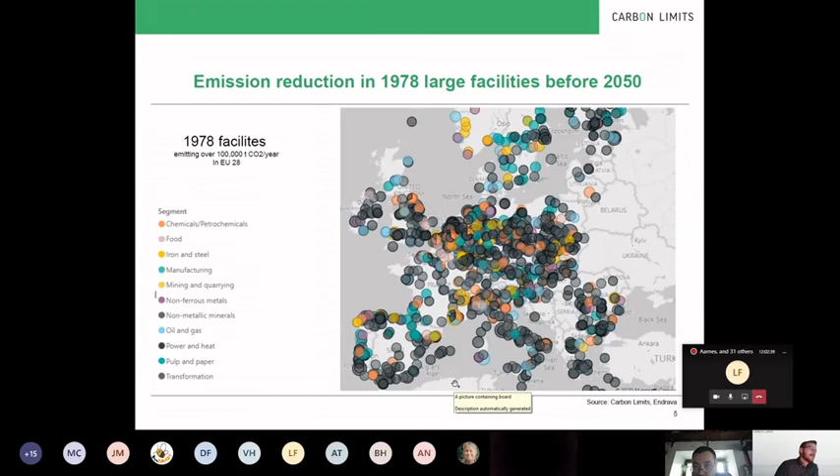And if you look at the industries with high to medium likelihood, which would be cement, waste-to-energy, chemicals, petrochemicals, refineries, and metals, you would have something like 275 million tons of CO2 in technical potential. For waste-to-energy and cement, which is high likelihood, you could have 167 million tons per year.

So hydrogen is, of course, something that is a great uncertainty too. There's a great uncertainty on the level of hydrogen production in the future, which depends on the pathways taken for industry, transport, energy. And also for CCS, it depends on which pathways are taken for production.

And there seems to be a clear trend that most analyses see that hydrogen production with CCS is more cost efficient than green hydrogen, but green hydrogen seems to be pointed out by countries and the EU to have a higher potential in the long term.

But which of them would win is difficult to tell.

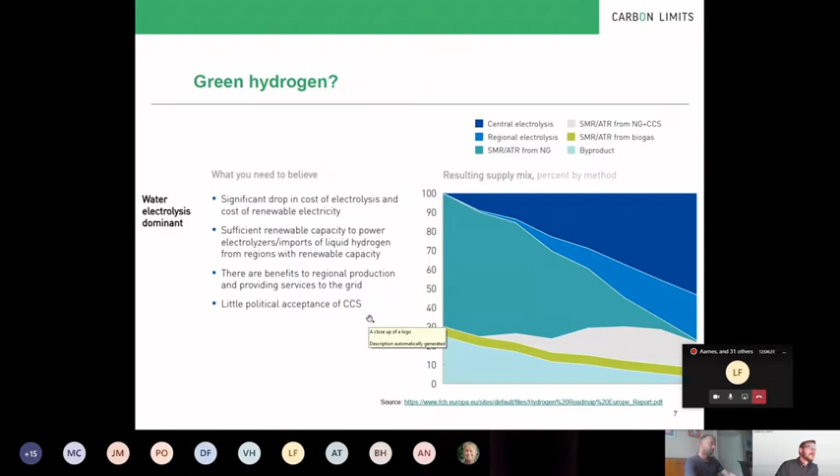This is from the Hydrogen Roadmap Europe, and I love this figure. It says what you need to believe for each of the scenarios, green and blue hydrogen. One of the things you would have to believe for a large-scale green hydrogen is little political acceptance of CCS and a drop in costs for electricity and electrolysis. While for blue hydrogen, you would believe that steam methane reforming is more cost efficient, and that CCS is feasible and politically accepted. So there is a wide range of potentials for hydrogen and a wide range of outcomes for the production route.

But it's hard to see today.

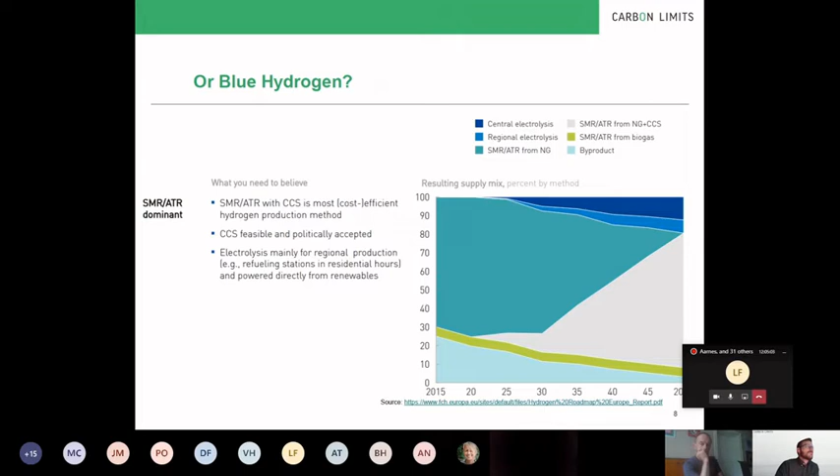So what the European Green Deal would mean for industries is that the goals and targets say that we're going to net zero. That means that in 30 years, every emission point has to be mitigated somehow, if possible. If not possible, then compensating volumes must be removed with bio-CCS or natural sinks.

So that also means that the prices will increase. You'll be facing higher emission prices to push you out of emissions, and I would think it's timely to consider which abatement options you have, which technologies are available, which could be more competitive in the future.

Is there R&D effort necessary? Is infrastructure necessary? Is our industry willing and able to pay a higher emission price, or is some other industry better equipped to pass costs on to their consumers?

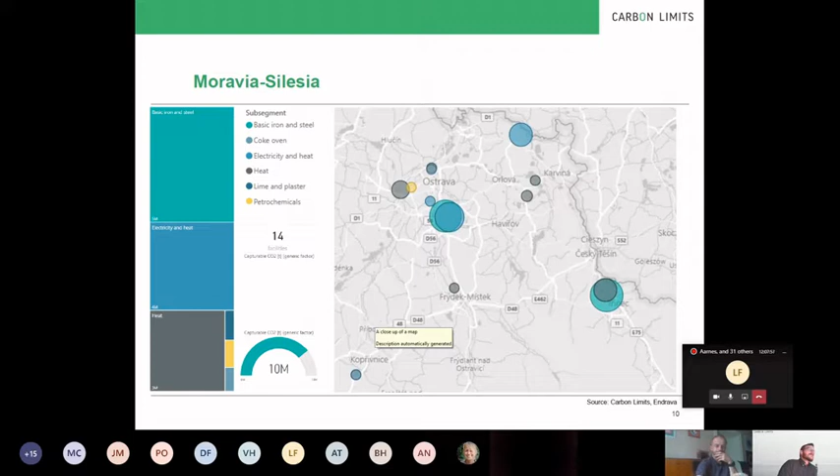While if you went for a blue hydrogen route, you would still need more electricity, but you would also need CCS, or transport and storage infrastructure for CO2.

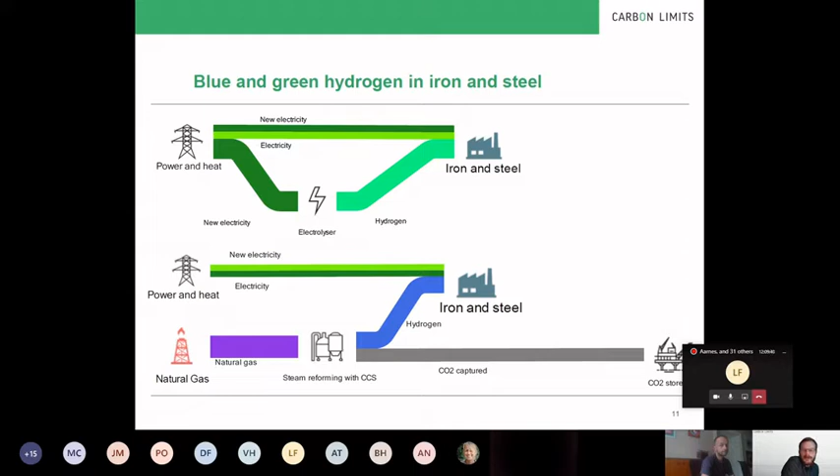My message here today is that there isn't much time, and it's timely to think about what the options are. But CCS works. It's going to be implemented in Norway and other countries. The storage and transport infrastructure is planned to come into place, which can take third-party volumes. And in many cases, it is competitive. The future will see how much comes out of it.

So Carbon Limits, we can provide help in assessing in early stages what can be done: site-specific analyses, opportunities for use and storage, preliminary design of transport routes, greenhouse gas assessments of the partial or full CCS chain, and review of funding opportunities or incentives.

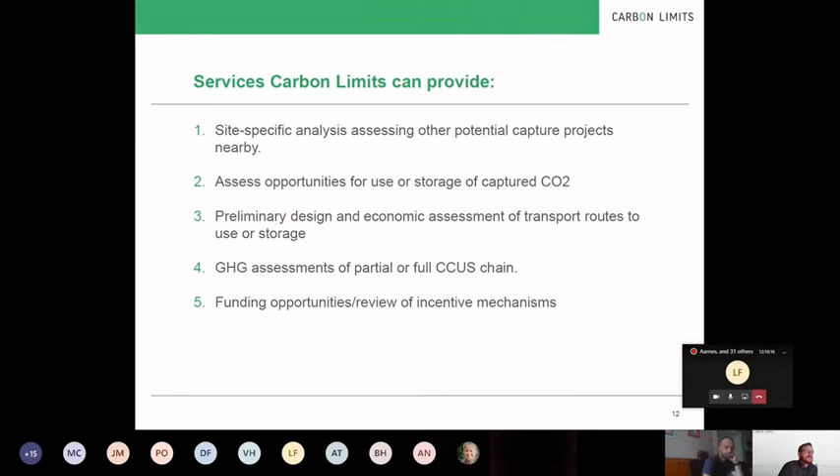So that was my brief introduction here. Are there any questions?

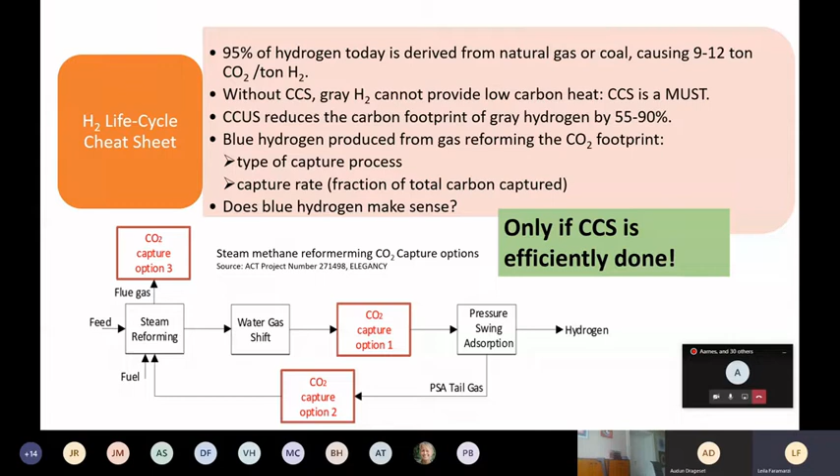Now, let's start the capture thinking very simple. Your industry currently emits a considerable amount of carbon dioxide. Let's imagine that scenario. And it might be hydrogen production, steel manufacturing, etc., that you want to integrate carbon capture technology to. There are various technologies out there in the market to choose from, and what you need to do is to set up a systematic technology assessment procedure.

And the first step to select a technology is to assess the type of flue gas that you're emitting, how much CO2 it contains, what impurities it has, what is the pressure of the flue gas. These are the most basic but the most important questions that must be addressed at the first step. So characterization of the flue gas must be done carefully before you bind your project to any specific technology. It means your work starts at your facility. When that is done, you start the technology selection process and go through the feasibility study and risk assessment.

By now, you have most likely listed a couple of technologies, and you start asking the suppliers of technology questions like, what CO2 capture rate is feasible? What do energy and heat requirements look like? You ask about CapEx and OpEx, environmental impact assessment, etc. And you need to look into integration aspects too. Like, do you have excess heat at your facility? How much space do you have available? Is your upstream process very dynamic? And if so, how does it impact the various technologies that you have listed?

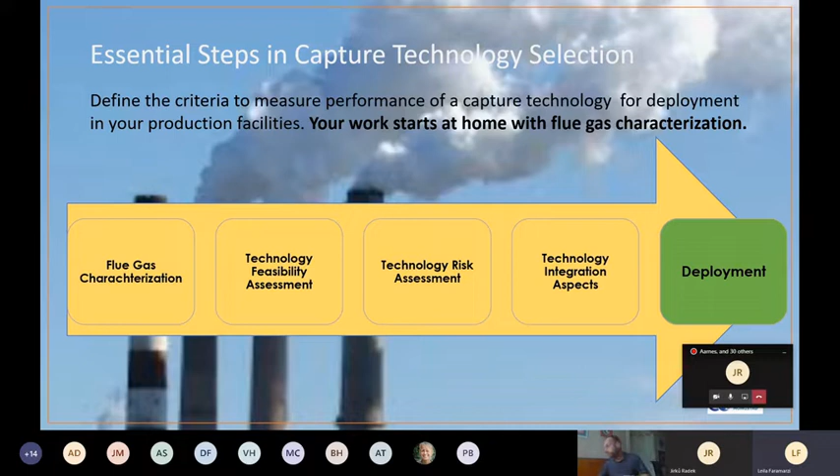Okay. Now, the main benefit of a systematic technology assessment procedure is that you will crunch the risk curve and avoid pitfalls through the life of your project. This graph tries to visualize this concept.

Because CCS does not have a long industrial history, it is natural that there are risks associated with it. But the majority of risks are quantifiable and manageable, and this is the main message of this presentation. If you identify the risks appropriately, you can avoid or mitigate them. So through technology qualification, you can manage your CapEx and OpEx.

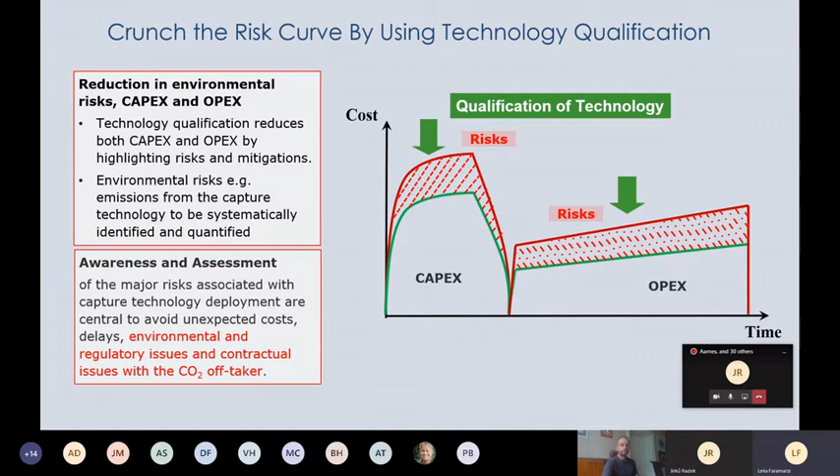So now imagine you're an industry that does not know much about CCS, and imagine that you have not built a concrete and systematic architecture for your CCS project, basically to minimize risks that we showed in the previous slides. The result can be bad surprises and pitfalls. We've listed some of the observed pitfalls. These are our observations in this slide,

and some of these items we have learned after operating our carbon capture facility for 8 years. For example, a chosen technology may not match the flue gas specifications for your specific application, or the actual operating environment is not tested, or models and prediction tools are lacking, or when they are available, they're poorly validated due to lack of operational data. And the consequence is going to be obvious. You face budget overruns, poor carbon capture efficiency, and poor reliability and frequent downtime of your facility.

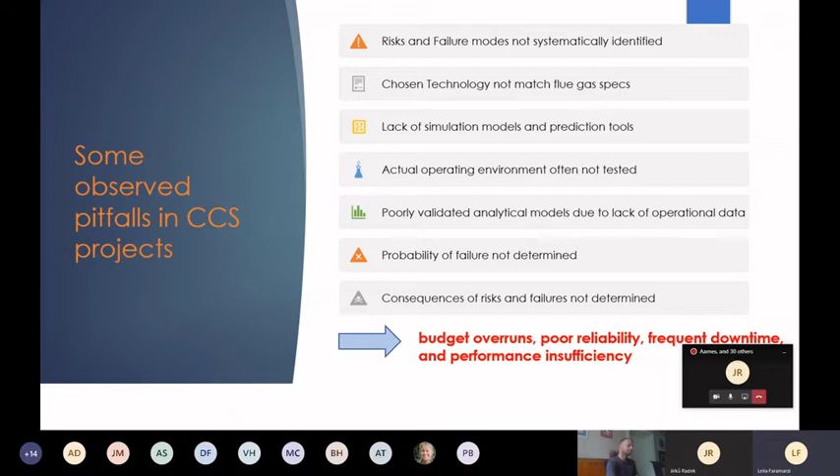Now, with all that background, we can say that Technology Center Mongstad, or TCM, that you see in this picture, is the major tool in the Norwegian government's toolbox to de-risk carbon capture technologies. In Norway, apart from funding commitments, the government has been involved in the technological development of CCS to reduce technical risks and uncertainties. That is achieved through Gassnova, a state-owned company that oversees CCS efforts in Norway. We have a presentation by Gassnova afterwards.

Gassnova, on behalf of the government, owns 77% of TCM, and the rest is equally shared between the 3 industrial partners, meaning Equinor, Shell, and Total. So TCM was launched in 2012. Our facility is on the west coast of Norway, and we are neighbors to the Equinor Mongstad refinery. You see the refinery on the left of this picture.

Also, in our vicinity, there is a natural gas combined cycle heat and power plant. The power plant is this white building that you see in the right corner of the picture. In the middle, between the yellow, red and white arrows, you see TCM. So the unique location of TCM next to a refinery and also next to a power plant provides interesting opportunities in terms of flue gases that we treat. TCM is designed to treat both the refinery flue gas and the power plant flue gas.

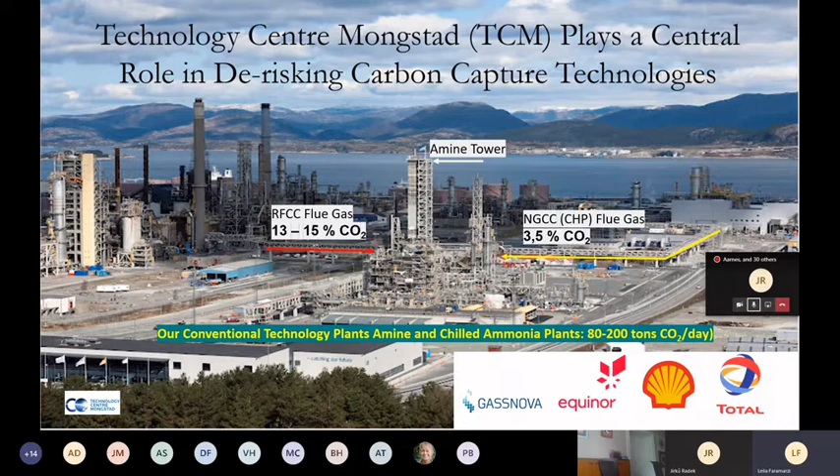We also developed an area for demonstration of novel or alternative carbon capture technologies. This is an exciting development that I speak about in this slide and the last slide, basically. The area that you see in the right side of the picture is an area that we developed recently. It's about 640 square meters.

And we are going to start demonstrating 2nd generation technologies that are alternative to chilled ammonia and amine technologies. From autumn 2020 was the plan, but I think we start early next year now. There's a slight change in plan now.

And this new site that you see in the picture, you see the pavement here, we are able to capture around 20 to 50 tons of CO2 per day in this new site, and it is designed for technologies like membranes, adsorption, alternative contactors, and basically anything alternative to conventional technology. And with that, I pass it over to you, Audun.

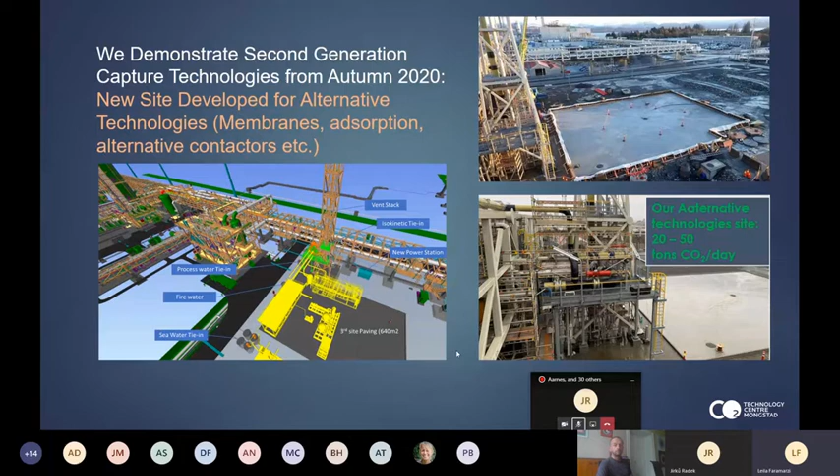Yeah. Thank you, Leila. So our aim to implement carbon capture is to solve a global problem. And it's important that when we do this, we are safeguarding our local environment. And for my slides here, I will focus on the use of amine capture technology.

So it's important that we make sure that we have clean drinking water and the air we breathe is clean and we don't impact the surrounding earth. And we do have the tools to achieve this and implement CCS. And there are a couple of key steps to the road to success. If you go to the next slide, Leila.

So the first and arguably one of the most important steps is that we reach a common understanding between us, the plant owners and the ones who operate the plant, the public that shares the local area with us, so I shared a picture here of my hometown, and the regulators. So the knowledge needs to be shared amongst the participants.

The plant owner needs to assure the public that they will run the plant safely, and the regulators also need to assure the plant owner and the public that the plant can reach their goals of capture and that they will do this safely and protect the local environment. So if you go to the next slide,

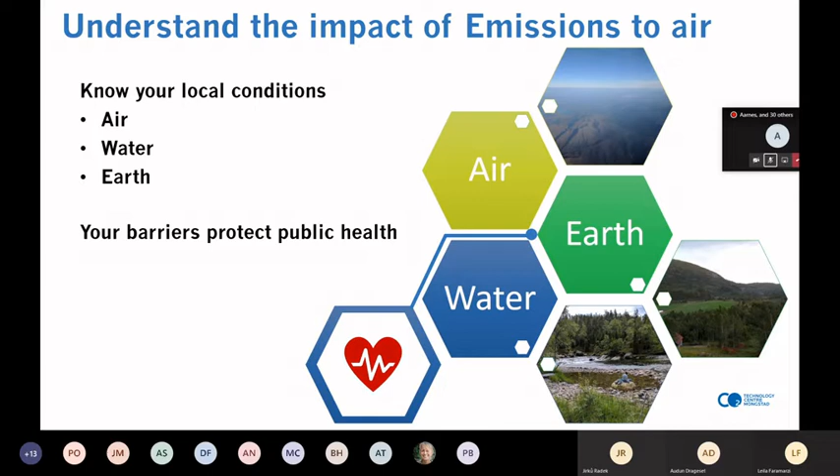So all of this starts off by asking the question, what happens to your emissions? And there are a lot of key steps here where we at TCM have a lot of knowledge, especially for following up emissions. How do we reduce the emissions? How do we adequately monitor them? So we have a lot of learnings here. And also looking at how they are dispersed in the atmosphere.

And then what happens in the atmosphere, because the amines we emit can react with the light in the atmosphere and other gaseous components in the atmosphere in photochemical reactions and generate new products. And some of these products, depending on the amine technology you select, could produce some toxic compounds. And you need to have this in mind when you select your technology. Think about the entire lifetime.

And then you can see where these pollutants end up in the environment. And then you can also plan how to follow up and under what conditions you need to put safe limits to emissions.

So these steps sort of work in reverse when you are early in the project. You see what is in my environment. Is there agriculture that already puts amines into the environment? What is the seasonal variation?

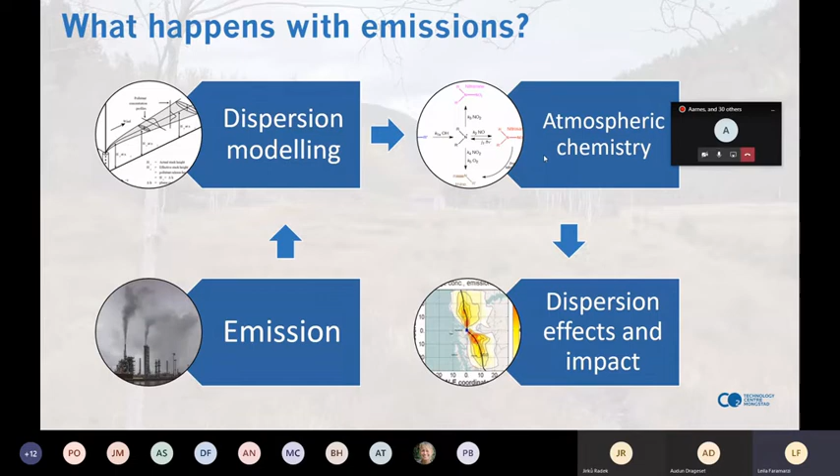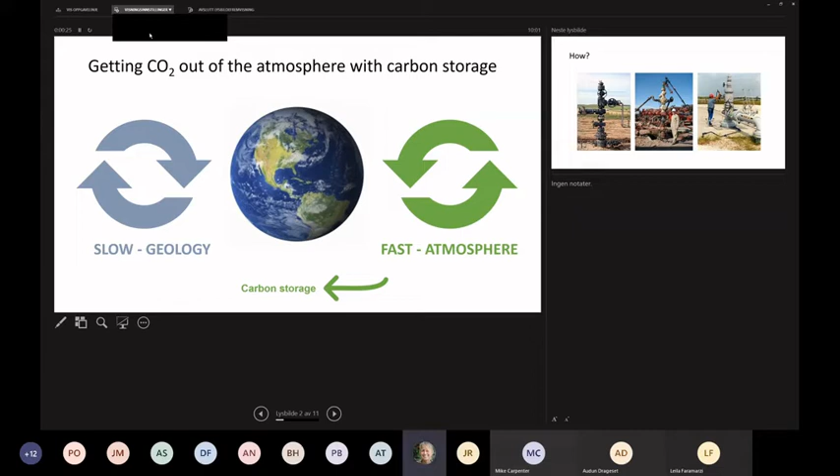And yeah, back to you, Leila. Thank you very much. Are there any questions for myself and for Audun? No, apparently not. Everything has been clear. So with that, we pass it over to Mike Carpenter. Mike, please. Okay, can you hear me? Perfectly, yes. Yes. And you can see my presentation? Not yet, actually. It's a black screen, Mike. At least for me. Is that better? A lot. Excellent. Yeah, okay, now perfect.

Thanks. Thank you for the invitation to present. I'm going to talk about options for what to do with the carbon dioxide, having captured it and separated it from a process stream or waste stream flue gas. And what we're aiming to do here is reduce the carbon dioxide going into the atmosphere. And what we've been doing for the last 100 years, while we've been using energy from oil, gas and coal, is taking hydrocarbons out of the rocks, burning them, and the carbon dioxide waste gas has been going into the atmosphere.

So the Earth has a natural carbon cycle where carbon is moving between the atmosphere, the biosphere and the geosphere through natural processes. And by burning oil, coal and gas, we've been accelerating the output of carbon from the rocks into the atmosphere. So carbon storage is a process to try and reverse this, to help rebalance the natural carbon cycle by taking carbon dioxide that is on its way out to the atmosphere and recycling it back into the rocks. So taking CO2 from the fast carbon cycle, the atmosphere, and putting it back into the slow carbon cycle in the rocks.

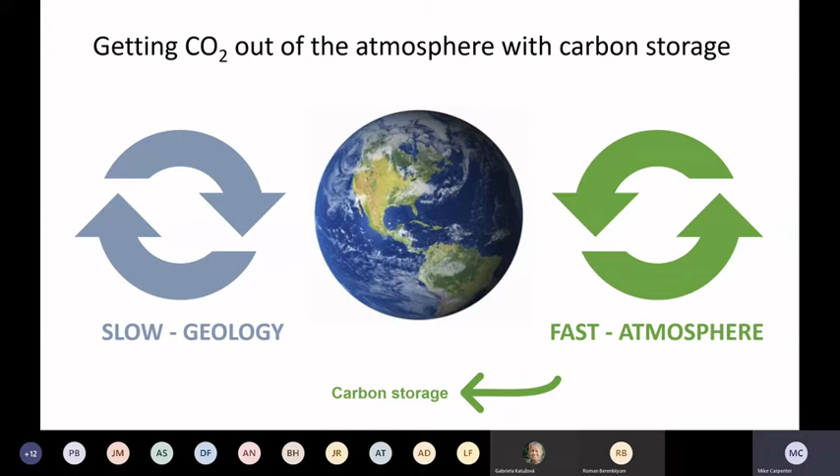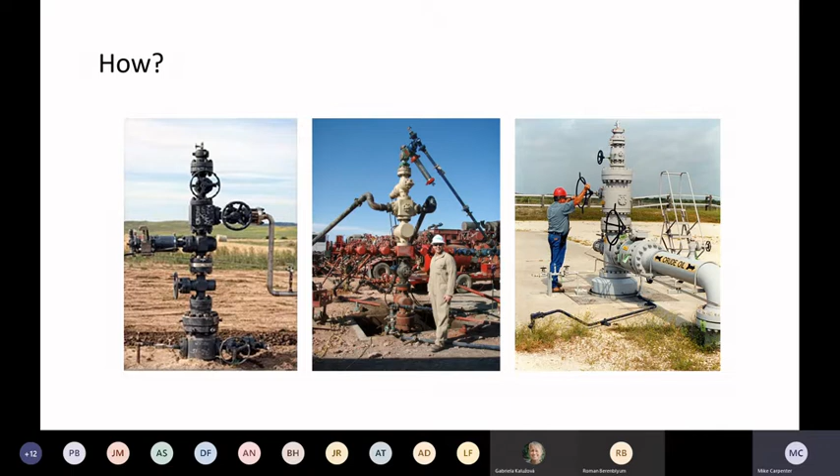Now, how to pay for this? Obviously, it comes with a cost. You have to compress the CO2, you have to pump it, you have to drill multiple wells, and you have to monitor to make sure that you're doing this in a safe way. And it also requires exploration, similar to oil and gas exploration, to find the geological structures that are suitable for storing the CO2. This can be onshore, it can be offshore.

The costs for CO2 storage are generally lower than the costs for CO2 capture, but this depends on what kind of waste stream the CO2 is coming from. But the experience we have in Norway is that it takes a long time and it does cost money to explore for these kinds of geological sites and to operate them.

So this is where the idea of a public-private partnership comes in, because carbon capture and storage is something that national governments and the European Commission want to achieve. It's something that industry also wants to achieve. And it requires financial support from many sources in order to put together a funding jigsaw puzzle and an organizational jigsaw puzzle to make this happen.

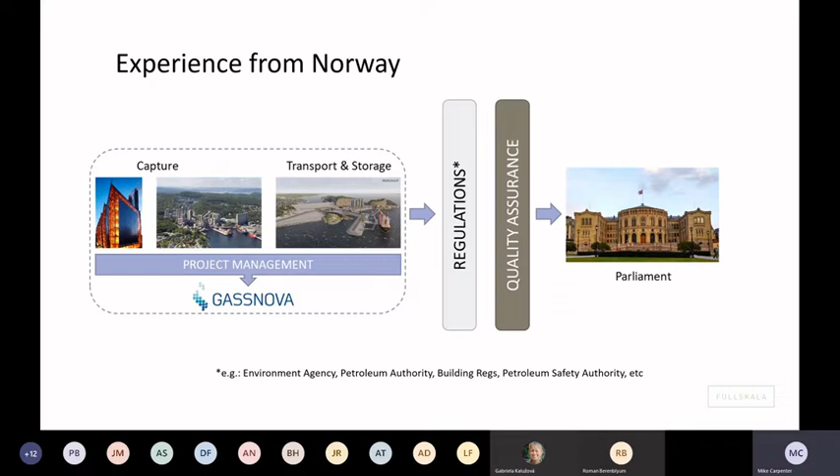So again, the coordination has taken a number of years, but we're seeing the fruits of that now. There's a little bit of information about how Gassnova has done that coordination. I'm happy to answer any questions on that.

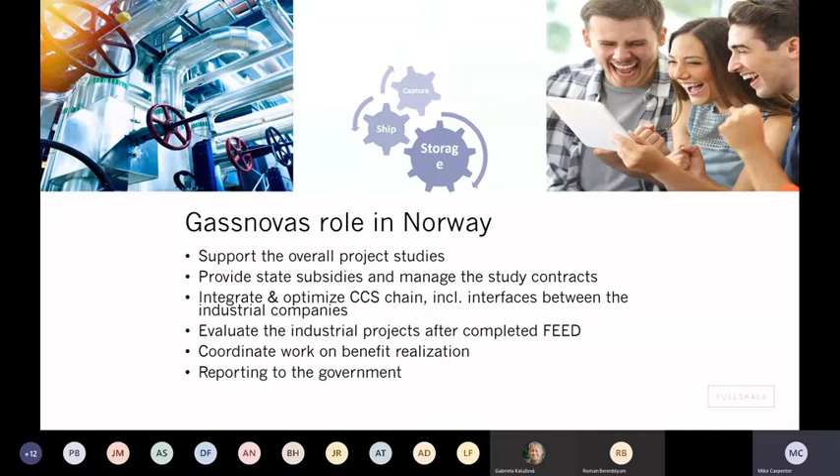And then I just want to finish by highlighting the collaboration between Czech Republic and Norway already when it comes to CO2 storage. The Czech Geological Survey has done a lot of work mapping CO2 storage potential in the Czech Republic. And we're lucky to have Vít Hladík on the call today. He's been coordinating a lot of that research at the Czech Geological Survey, and he's also available to answer any questions. Thank you very much.

Thank you. Is there any question for Mike?

What I want to tell you today is some aspects of the hydrogen value chain. I think in the previous presentations we've heard a lot already about the role of CCS and hydrogen, and I will expand a bit more on that and also talk a bit more about the transportation and the end use of hydrogen. But before doing that, a few words on our company.

DNV GL is a global quality assurance and risk management company. We are active in the maritime sector, where we started, oil and gas, offshore, also in CCS of course, and in the power sector as well. In these sectors we offer verification and certification services and also advisory services. Our purpose is to safeguard life, property and the environment.

As much of our business is in the energy sector, it is of importance that we consider this energy transition and what role it will play for our business. For that, I think we all agree that we have to do something about our CO2 emissions. We agreed in the Paris Agreement that we want to limit the heating of the atmosphere to 1.5 degrees, preferably, and that calls for action. As already mentioned by Peter, we do not have a lot of time left, and I think there's not one solution that will enable us to meet these efforts. In this whole spectrum, hydrogen and also CCS plays an important role, but as already mentioned, it is not the only solution.

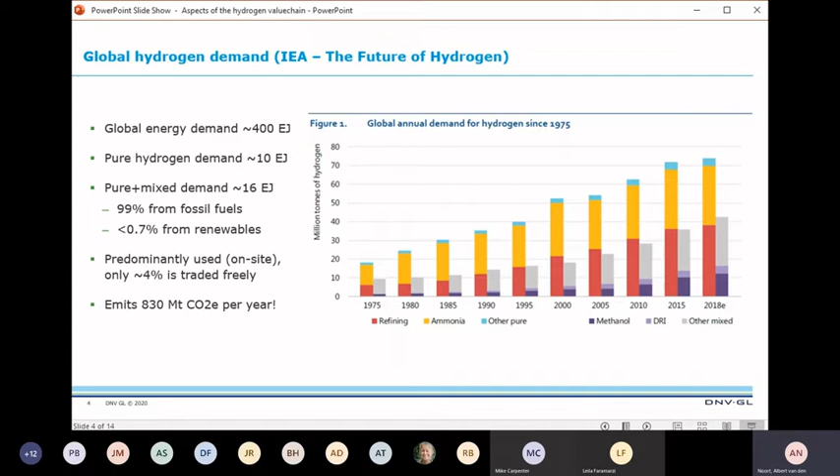If you look at the hydrogen value chain, we've already discussed the production of hydrogen. There are different colors labeled to hydrogen. In this future we want to be carbon neutral, which means either we produce hydrogen from gas via SMRs or ATRs, where we capture and store the CO2 - that's called blue hydrogen. The other route is from electrolysis, and as already mentioned, you need a lot of green electricity for that - you produce hydrogen from water with electricity. So those are the two primary ways of producing hydrogen.

But once you've produced the hydrogen, you also need to transport it to the end users that in the end use this hydrogen, and there are different routes available there as well. That depends on the quantity you want to transport, and also the distance you want to transport it. Currently, roughly 85% of all the hydrogen that is produced is consumed on site.

If you have a refinery, often there is an SMR available that produces the hydrogen, which is used for the desulfurization of the crude oil products. So most of the hydrogen is consumed on site. 15% is transported via trucks or via pipelines, and a very small share is traded freely.

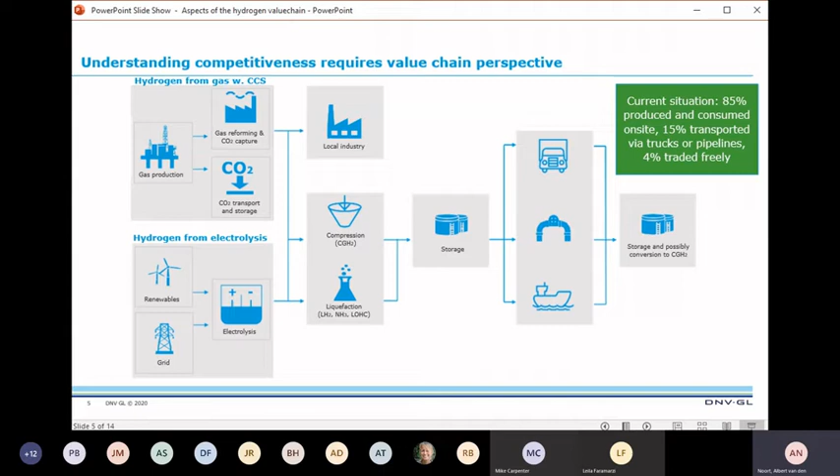And with electricity, that's quite difficult, especially if this electricity is produced on moments when the wind is blowing or the sun is shining, which is not necessarily the moment that the electricity is needed in the different sectors. And there the hydrogen comes in handy, because if you convert the electrons to molecules, the big advantage is that you can store them more easily, and also transport them in larger capacities via gas pipelines.

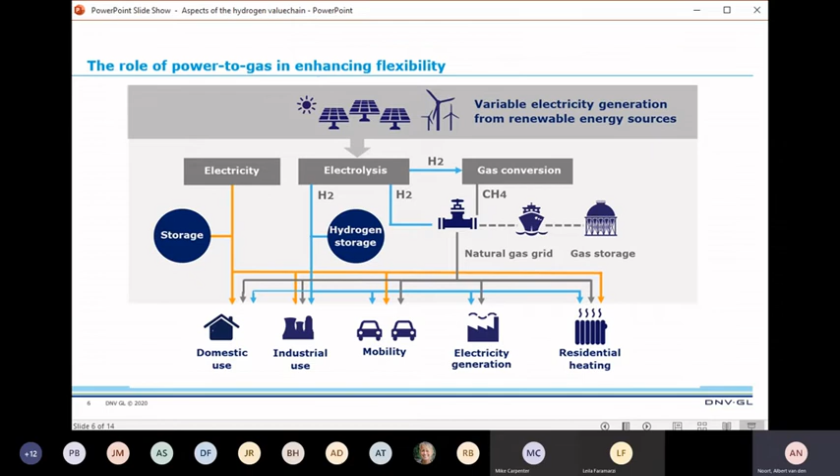I put in this slide before knowing that this was already mentioned in the previous presentation, but nowadays we produce hydrogen, as said, mainly from natural gas. We see a transition towards blue hydrogen, where we convert the natural gas into hydrogen and capture the CO2 and store it underground. But in the end, we look at green hydrogen production.

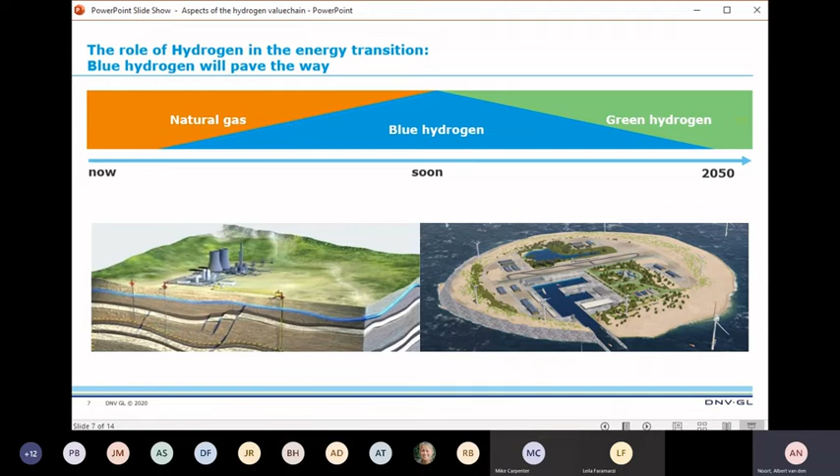...that there are quite large ambitions for offshore wind, and the wind farms are placed further and further away from the coast. And at a certain moment in time, it becomes more attractive to transport the energy in the form of hydrogen compared to cables towards these offshore wind farms. And that's also onshore one of the cases, and that's shown here. This is an example from the Netherlands.

And on the other hand, we are planning a lot of wind farms on the North Sea. And the TSO for electricity, TenneT in our case, has quite some difficulties connecting all these wind farms to the electricity grid. So extending the electricity high voltage grid in the Netherlands, and also the same holds for Germany, for example, is quite difficult because there's resistance to building new overhead cables. While on the other hand, there's an underground gas infrastructure which will become available.

And that leads to the idea of converting part of this grid to a hydrogen grid. This is the example from the Netherlands, but the same holds for Germany as well.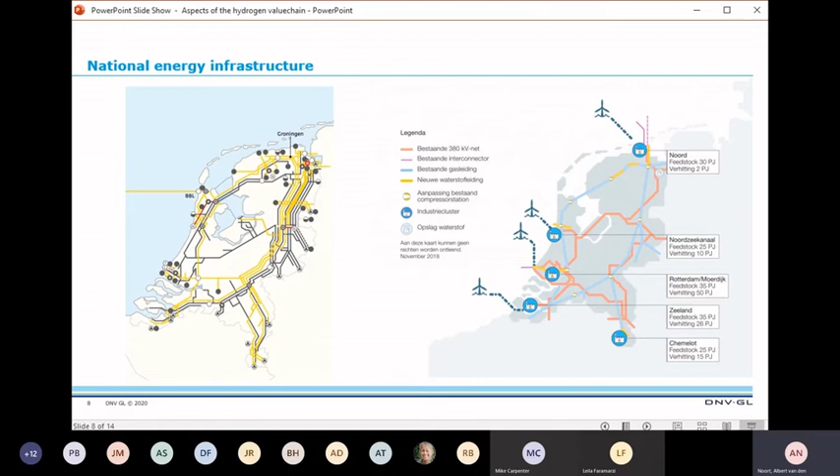If you look at reusing the infrastructure for hydrogen, the gas infrastructure, there's been a lot of research going on. In the past, we conducted a large European project called NaturalHy, where we looked at using the existing gas infrastructure for hydrogen, which ended around 2010. After that, as DNV GL, we set up a joint industry project called HyReady, where we took all the learnings from different research projects and made practical guidelines on how to convert gas infrastructures to hydrogen.

Mainly looking at the blend of hydrogen and natural gas, we did that for the transmission parts, but also for the distribution grids. We looked at the end user appliances and the compressor stations as well. So for each of the components in this grid, we made guidelines on how much hydrogen they can easily afford without much consequence, and when there will be consequences, what mitigating actions would keep them within acceptable limits.

And that's also, of course, important: what are the risks associated with converting infrastructures to other gases?

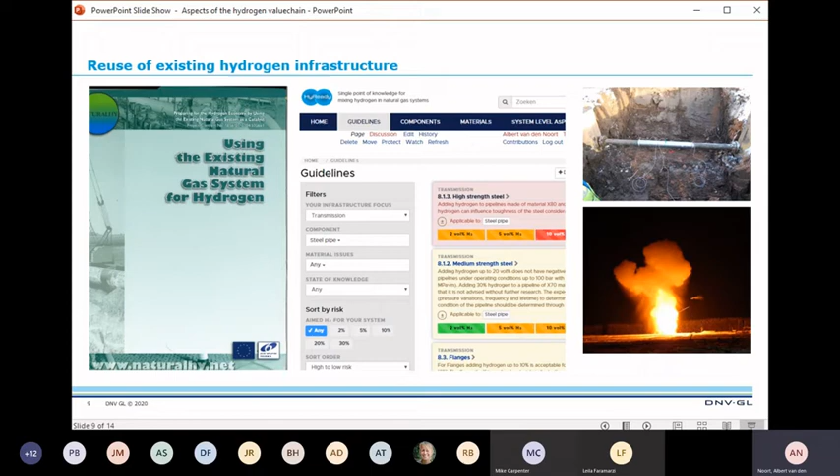Another part of research that we've done recently is that if you switch from natural gas for heating to hydrogen, you need to adapt your burner systems. This holds for industry, for large-scale burners, but also for the small ones typically used in the Netherlands for heating houses. It could also be extended to those used in power generation.

What is known, of course, is that if you burn hydrogen, it burns much quicker than natural gas, so you need to change the burner system. If you add a percentage of hydrogen, you can solve this by changing the control mechanism of the burner. At a certain stage, you might also need to replace the burner system itself. But in principle, it should be fairly easy to adapt existing burners for the use of natural gas and hydrogen.

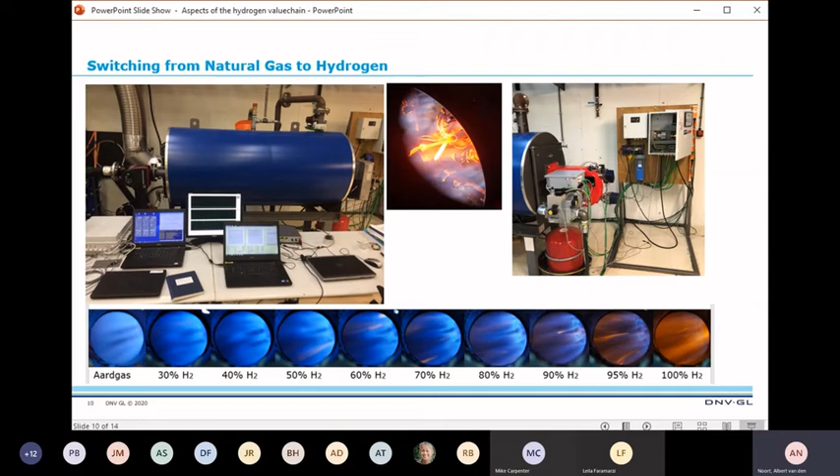In the first phase, we produce the hydrogen and convert it into methane. That's also a possibility, where you preferably use captured CO2 to produce methane again from hydrogen.

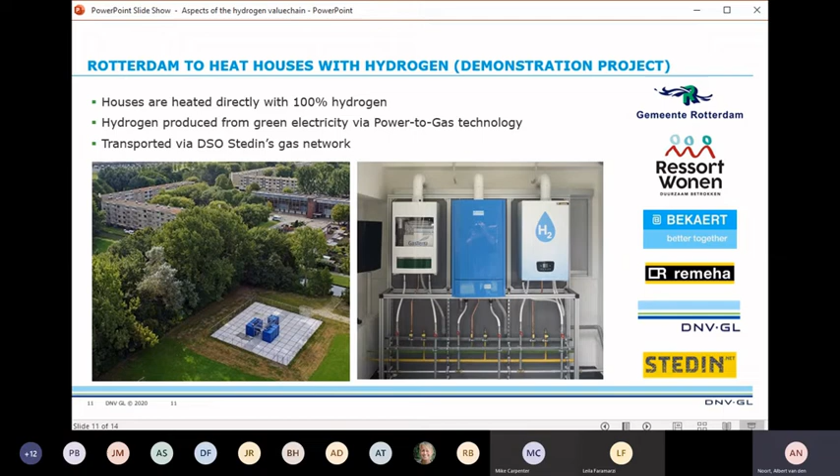And then you can use it in existing boilers and infrastructures as well. This is a very small project. A larger project is executed in the UK, where near Leeds, the H21 project is currently executed.

The idea is to convert a number of cities in the northern part of England to hydrogen for heating. Also, this hydrogen is produced via SMR combined with CCS, and then transported via pipeline systems to the cities. And in the cities, it's used in the households for heating. And once again, here we were involved in this project mainly to prove the safety case.

So we've built a number of houses on the same remote location I was mentioning before. And we did experiments on leakages in the houses, hydrogen buildup in the houses, to see if there are dangerous concentrations and what countermeasures you can take. We did different experiments on the flow of hydrogen through the soil on large-scale releases for 8 bars and lower.

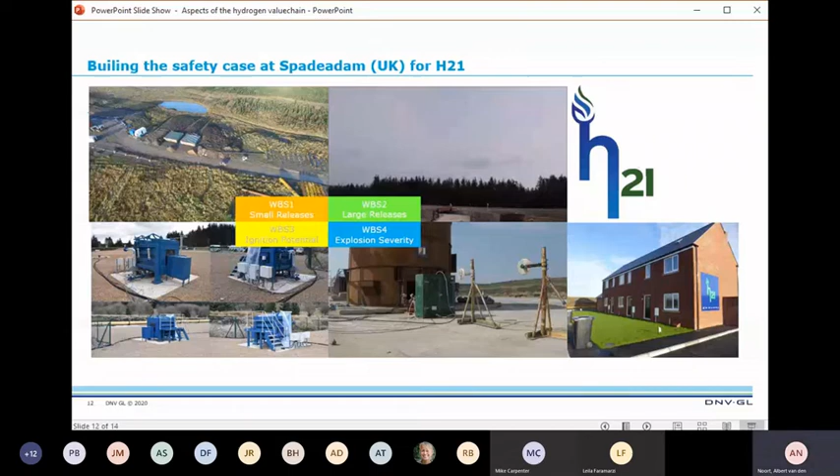The effects of explosions here in the middle, and also the ignition potential. Hydrogen ignites more easily than natural gas, but what kind of sources would be dangerous, so that you can ignite a dangerous concentration of hydrogen in houses or near pipeline systems. So that's ongoing work that we do in the UK.

And with that, I hope that I've given some extra information on the role of hydrogen in different aspects of the value chain. So I think it's important not only to look at the production side, but if you want to optimize the system, you need to look at what is available. If there are pipelines available, you can reuse them, for example, or you would need to improve your electricity system, which also means a lot of extra costs.

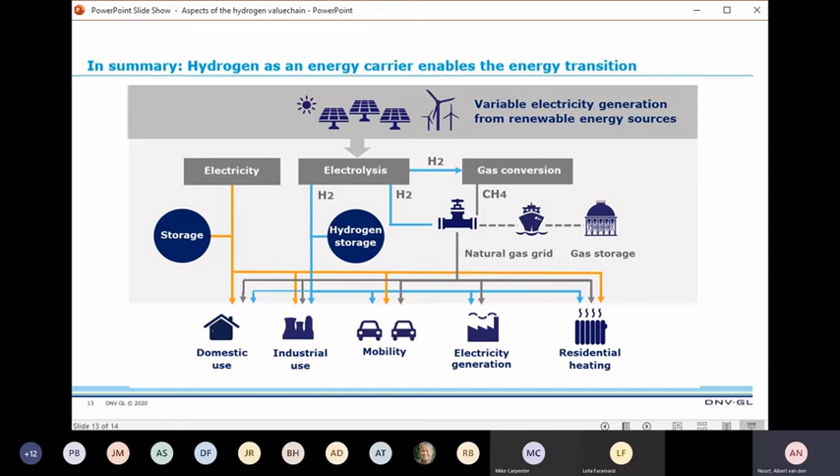I have one question for you, Albert. What are the potential business cases for methanation of hydrogen in the future? The potential business case. Well, methanation is interesting if you have a distribution grid with a lot of end users that are too costly to convert directly into hydrogen.

The downside of methanation is that you again burn methane at the end, producing CO2, which is probably emitted to the atmosphere. But if the CO2 which was used in the methanation project is from the short cycle, as mentioned by Mike, then that should not really be a problem. But the main business case is that you use methanation if there are a lot of small end users that are too costly to convert directly to other carbon-free solutions.